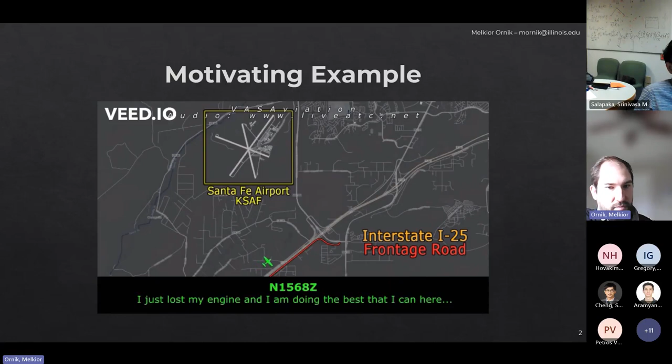6-8 Zulu, declare an emergency. Roger, you want to come in for runway 2-0? I don't know if we can get there - we just lost our engine power, something's happened. Roger, wind is 2-3-0 at 10, you're clear to land any runway at Santa Fe, altimeter 3020, can you give me some information? I'm 6 south, I've got a big vibration going on, my prop's going bad here and I don't know what's going on - I've been at 8,500, I don't think I can get to the runway. Make straight in for runway 2 if you can, but the wind will be a tailwind, 230 at 10, you can have any runway you want, clear to land. I don't know what's happened here, I have no oil pressure. Right on final for runway 2, you're 7 miles from the airport. I don't think I can get - I'm not gonna make it. Let's see, where's our best place to go? I'm gonna try to stay away from that ravine - freeway. I-25 is in your vicinity, and maybe the frontage road off of I-25. There's 3025 - I'm just not gonna make that, I'm not gonna make it. 6-8 Zulu, can you tell me what's going on now? Try to land on the freeway here if I can. My engine - I have lost the engine, and I'll do the best I can here, to try to land on the freeway or on the frontage road. I think I'll take the frontage road. That'll be a good idea if you can. The Santa Fe winds are 240 at niner.

Landed. I'm landed. I'm landed.

Okay, so I included these last few seconds just to make sure to tell you that everything is okay with the pilot. The pilot survived, but this is the story that I'm interested in exploring.

So what happened here is we had an airplane. It was a small private airplane, not the one pictured here, where something went wrong, and it's not entirely clear to the pilot at the beginning what is wrong, and then these errors or faults seem to be compounding. He says, 'Oh, I have a big vibration going on,' and 'Oh, I lost the engine power.'

So there's a lot of uncertainty here about what's going on, and what the pilot is ultimately seeking is what I would call maximal understanding in the face of this kind of minimal or limited knowledge that he has.

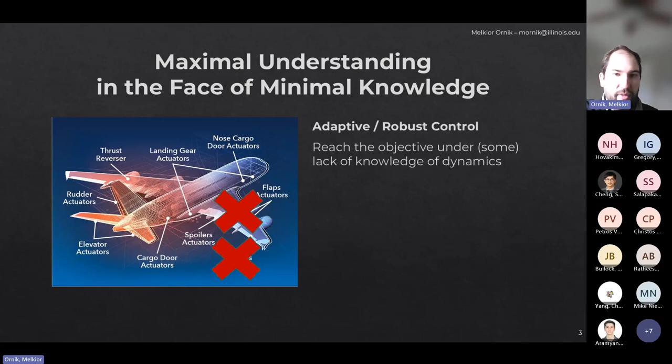The problem that we have here, and the problem that the pilot seems to have faced, or at least believed he faced, was that the objective might not be reachable. If there are no physical capabilities to land, if you simply can't make it, at that point there's kind of limits to what robust control or adaptive control or any other kind of control can do. If there is no control law that will take you to your destination, then you can't do anything.

And so in this case, the pilot did what the FAA regulations say he should do: he decided on an alternative target, an alternative destination. There were no runways around, so he decided on the freeway or the frontage road of the freeway. He says relatively early, 'Okay, let me take the interstate or the frontage road,' and then he figures out how to get there, and in this case he succeeds.

And so this is the story that I want to explore. This is a story in which control is a part of it, but part of it is deciding on where we can try going. In terms of the standard term people use, pilot in command, that implies the pilot has the final authority on everything happening in the airplane.

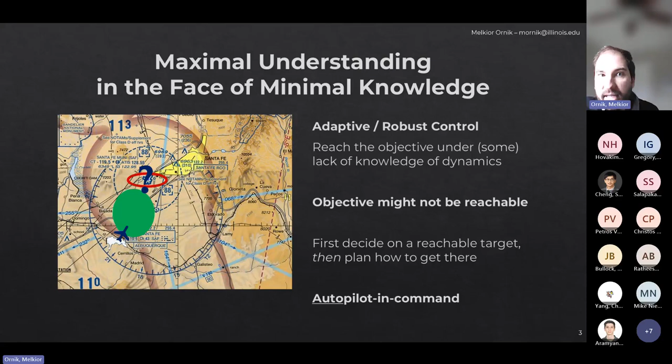I want to develop something that I would call autopilot in command. So a system that is not simply oriented towards trying to achieve the task as best as possible, but has some sort of higher level reasoning of what am I certified for, what can I believe to achieve, given that I don't know everything, given that the system changed now.

And so formally, what I'm interested in this talk, and what a lot of our activities related to the ULI have been, is trying to get some sort of conservative estimates of completable tasks given a change in system, whatever that change means.

Formally, it means this: I have some sort of partially known novel transition model that happens after an adverse event. I call it partially known because there is some knowledge that I have. I have the original nominal transition model that helps me in some way. I have some knowledge of the design of the aircraft that also helps me know something about how the aircraft is operating.

I have some knowledge of physical laws, so I do have some pretty heterogeneous partial knowledge. I also have a partially or imperfectly observed past trajectory or current trajectory of the system that should also give me information about what I'm capable of doing or not capable of doing.

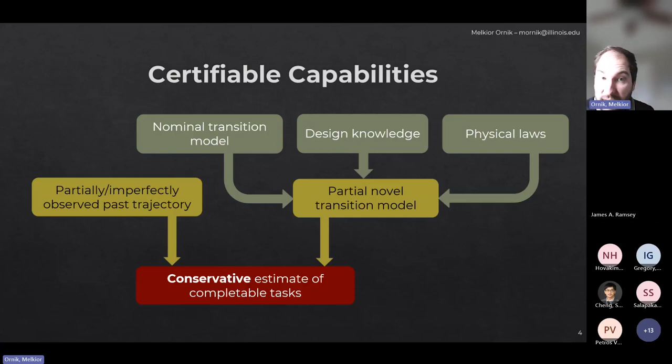And so I want to focus on, first of all, this phrase conservative estimate of completable tasks. I'm looking for something akin to formal validation, where I can say: regardless of what the ground truth is, for all possible ground truths consistent with the knowledge that I have, I can complete this task.

And this happens before figuring out how to complete the task. These are two different topics. How to complete the task comes second and certainly requires some online learning, some adaptation, some robustness. But I want to do this before learning how to complete the task.

And perhaps I want to even have a loop here where I figure out, okay, I'm definitely capable of doing this, and then I learn a little bit, and now I become less conservative, and I say, oh, I'm actually capable of doing this as well.

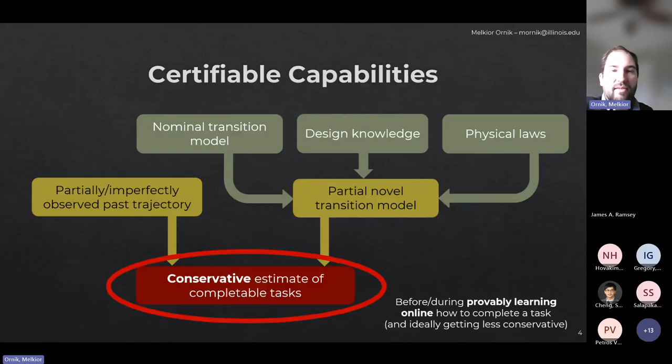And then I proceed and become less conservative. To give some mathematical meat to what we've been doing, I'm going to use a few slides that appeared when we all met at UIUC last semester. I want to model these disasters, these changes in the system, in three possible ways. I'm not necessarily claiming these are all the ways, but the combination of them is a fairly large class of possible things that can happen to the system.

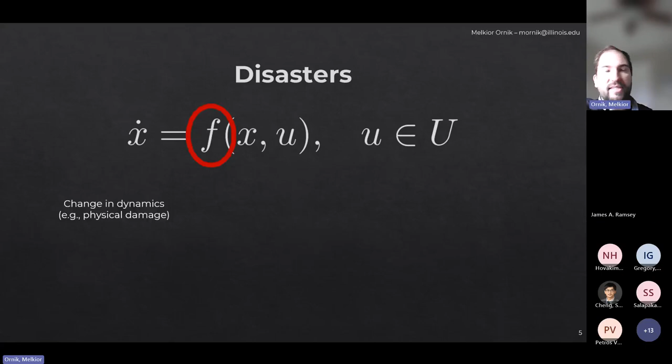The first one is a change in dynamics, so that the system, which used to be guided by x dot equals f of x, u, is now driven by some other f, possibly due to physical damage, for instance.

The second one is partial loss of control, whether it's actively lost through adversarial takeover, or simply that some of the controllers are now under environmental authority and can just put in random inputs. But basically, I don't have control anymore over the inputs.

And the third one is actuator degradation. So the system still has the same dynamics, I still have control of the actuators, it's just that the actuators lost their capabilities somewhat. They are now capable of doing less than they used to.

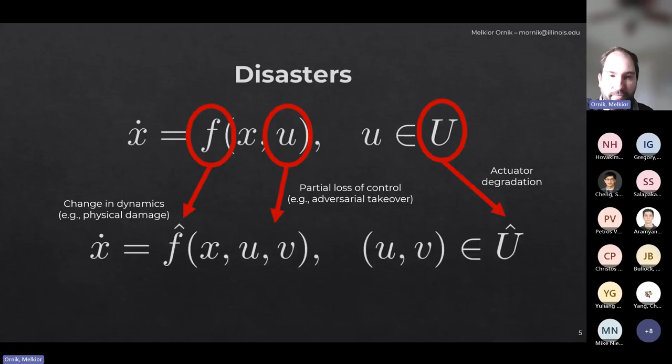Combining these three stories, we get a new kind of partially known transition model, x dot equals f hat of x, u, v, where f hat are these new, perhaps unknown or partially known system dynamics. U is decomposed into new u and v, where u is still under my authority and v is inputs not under the controller's authority anymore. This u, v now lives in some u hat, and u hat is the degraded set of possible control inputs, so u hat is smaller than u in some sense.

I want to go through these maybe from right to left, giving a few slides on each, saying what we're thinking and what I think the crucial mathematical ideas are. For today, I'm going to be talking about nonlinear, continuous time, sort of deterministic systems. That doesn't mean these ideas don't apply to other frameworks, it's just what we started with, and it seems mathematically very elegant. Yet the same high level ideas can apply in other frameworks as well.

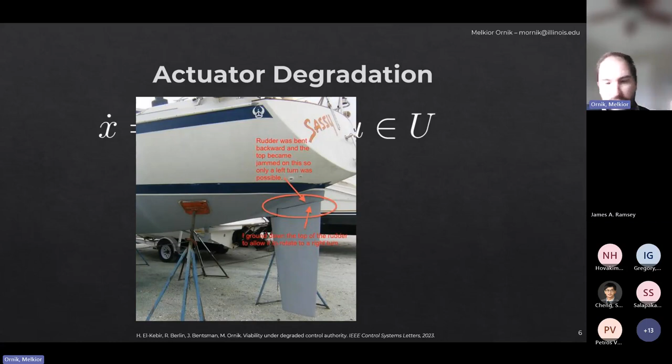An example of that is this, I found this on a sailing forum because it's a very nice picture. One of the sailboat owners said there's some damage to the back of the sailboat, so the rudder was bent backwards, and so I can't move to the right anymore, or almost at all to the right. I can still make a left turn, so he can still control the sailboat, he just has less of an interval, or less of a set that he can put in.

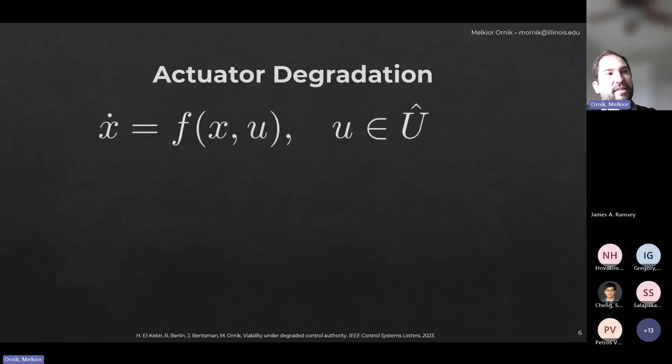Now this is, of course, equivalent—or not actually equivalent, it is less general, perhaps—to a different framework which we established and played with in a paper this year or last year, which is x dot equals f of x, p of u, where u lies in the original u. P is some sort of possibly saturation, which will reduce this set of control inputs. But it doesn't have to be saturation, it could be something that attenuates the gain or size of the control input, or some nonlinear function that changes the control input.

What we're interested in here is: okay, I have this new system, how do I figure out what is possible about that system? What tasks can we complete? Within the context of this talk, although we are definitely interested in more complex objectives, I'm primarily going to focus on reachability analysis.

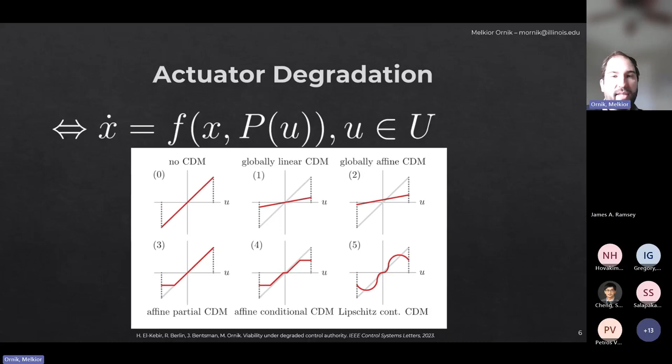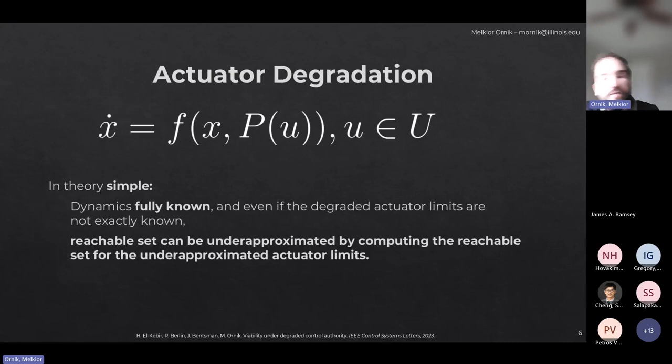So the question here is: I have this system that's fully known, and maybe I don't know something about P, but I might have some bounds on P, some under approximation of the capabilities. Figure out what's reachable by this system. In theory this is not a new or even interesting problem, because I have fully known dynamics, so all I'm asking is compute the reachable set of this system. Well, the system is kind of ugly, but still I know the dynamics. What can I do here?

Well, the problem is that I want to do this from my perspective of motivation, in real time or near real time. In practice, reachable sets of nonlinear systems are not computable in real time. Certainly even meaningful under approximations of those systems, and I'm interested in under approximations because I want to be conservative, are difficult.

So what is often done in practice is computing something called the operational envelope, which is a kind of proxy for a reachable set, where we say if the system is within this set, then it can do something. So it's somehow related to this reachable set. But the point is, this computation, this description of the operational envelope takes months to develop, whether through simulations, mathematical analysis, extensive testing, whatever it is. So this is not something done in real time.

Yet I need to adapt, or react to an adverse event in real time. And it's impossible for me to simulate all possible adverse events and have a giant database of all possible reachable sets. So what can I do?

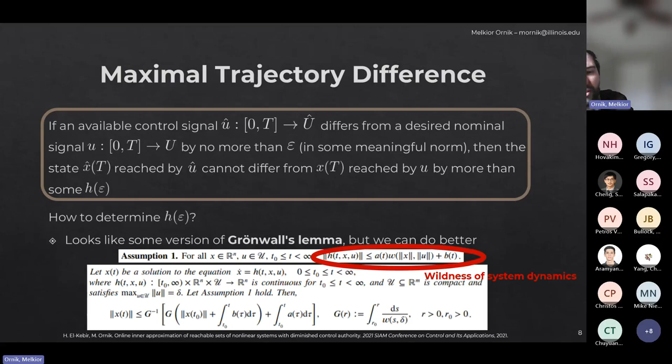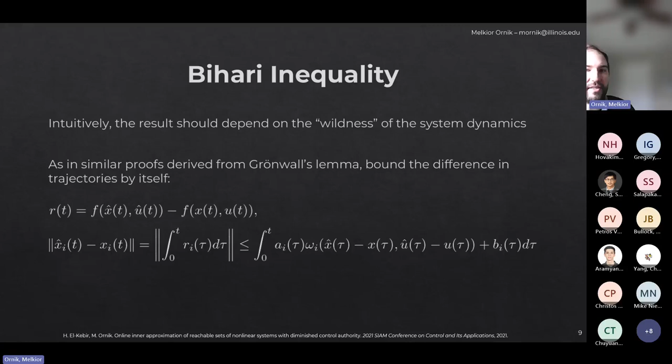This is true, there is a continuity argument. It looks like some version of Gronwall's lemma for folks who do nonlinear and linear dynamics, but we can actually do better. This is something a student of mine proved: given how far the available and degraded control signals are, he can give you a bound on how different the states reached by these two control signals are. This bound certainly depends on what I call the wildness of the system dynamics. So if the dynamics are very wild, then even a small change in the control signal can lead to a large change in the reached state. This is a generalization of something called the Bihari inequality, and the proof is similar to Gronwall's lemma. Again, the important part is that the result depends on this wildness of the system dynamics.

So the idea is this: if my old reachable set is gray, then the theory we developed says that within a ball from each gray point—and in this case my balls are rectangles, since it's perhaps better in some cases to do things for every coordinate separately instead of all together—there exists a state reachable by the degraded system, which I denoted in red. So around each ball around a gray state, there exists a red state. So to each gray state, I can assign a nearby red state. Now this still doesn't exactly tell me what the reachable set is, because I can assign the same red state to possibly a bunch of gray states.

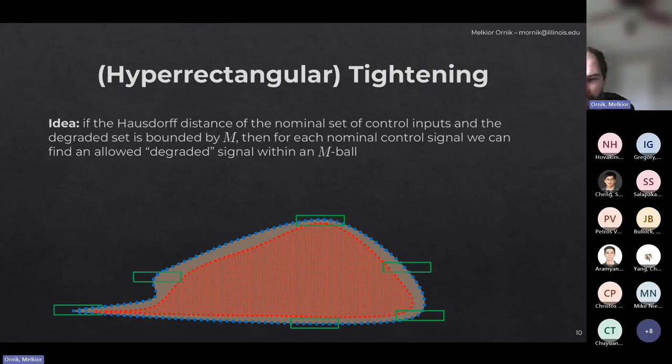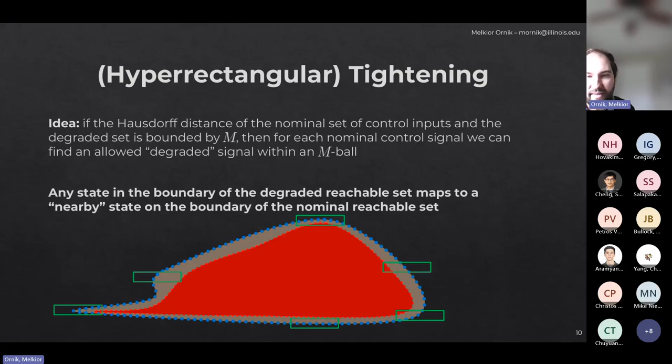So how do I know that this red set, the degraded reachable set, doesn't have a lot of holes in it in some sense? It turns out it doesn't. That's the second result: any state on the boundary of the red set also maps to a nearby state on the boundary of the gray set. So not only is red a subset of gray, but their boundaries are not too far from each other.

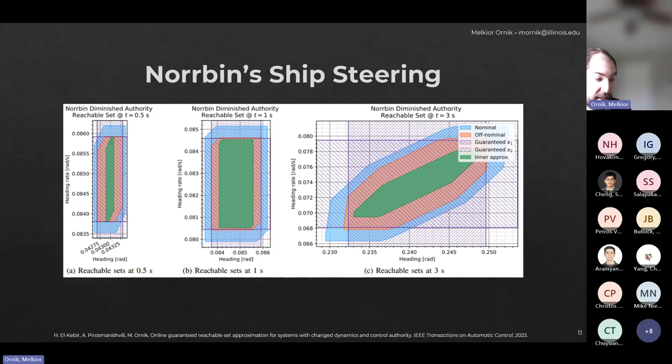What we're interested in now is two directions. One is how do I make sure the quality of this approximation doesn't diminish over time, which it currently does because of these differences in the wildness of system dynamics that compound. The other question is how do I do this for more complicated systems? So right now we're interested in approximating dynamical systems with polynomial approximations.

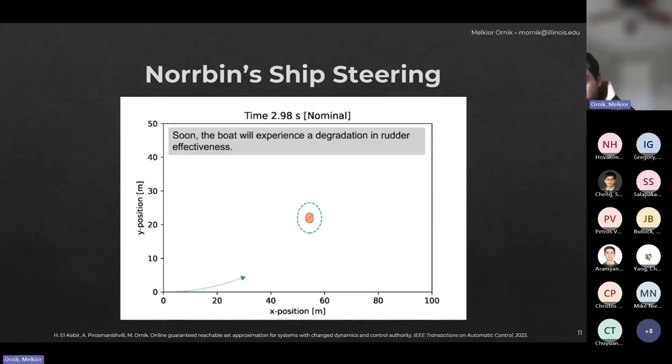But as an initial proof of concept, we have a picture of a boat going from the left to the top right corner, and it originally has a control law that avoids this unsafe blue region. At some point, the boat suffers degradation of the control inputs. We compute an under-approximation of the degraded reachable set, and we see that this under-approximation still has an element to the right that doesn't intersect the unsafe set.

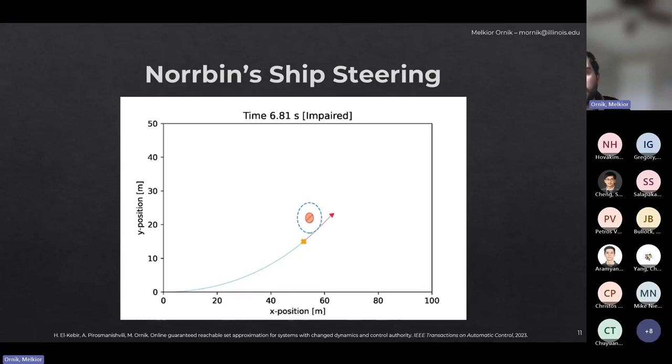So we know there exists a control law, although we still don't know what that law is, and I'll get back to that. But we know there exists a control law that allows us to escape from this unsafe set, or avoid reaching it. Okay, so this was the first and supposedly easiest part, the actuator degradation, which turns out to not be easy at all.

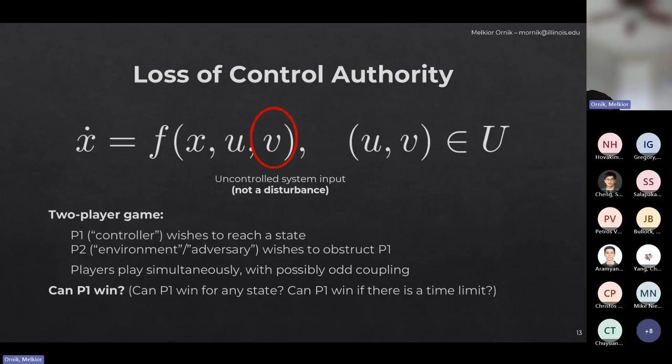Can player one win for any starting state, for any reaching state? Can player one win if there's a time limit in which to reach that state? And there are perhaps two key features of math that I want to introduce here. One is just from intuition.

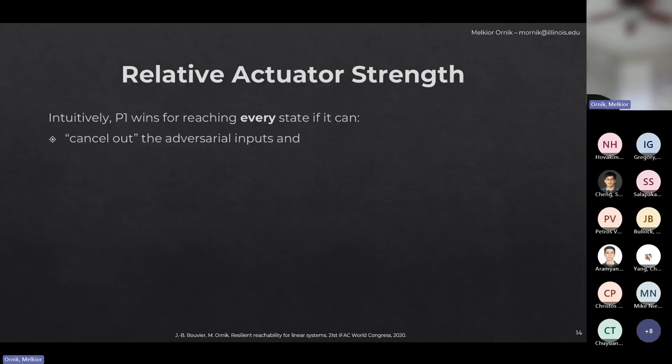I kind of said the pilot seems to be unable to counteract the bad inputs, the adversarial inputs. And so intuitively, player one wins if it can cancel out this adversarial input and still have a little bit of useful control. So still successfully fight what I call the drift, or exploit the drift at the same time.

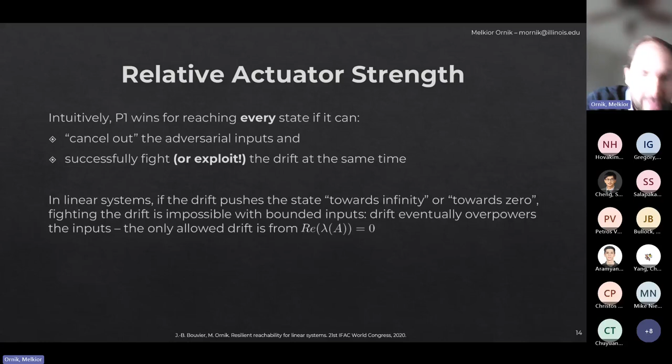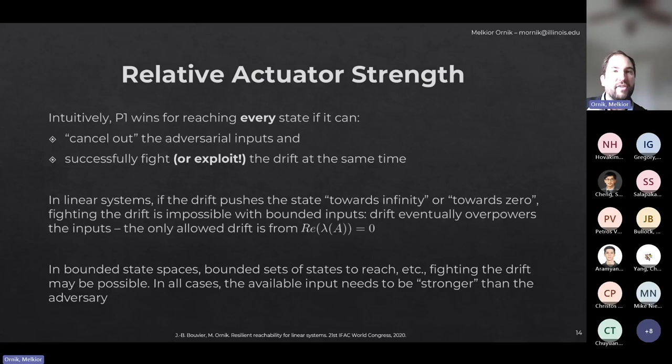And so it turns out that in linear systems, or in linear unbounded systems, that's very difficult to do. But in bounded state spaces, bounded sets of states to reach and so on, fighting the drift might be possible. And in all cases, this intuition of the available input needing to be stronger in some sense than the adversary is important. So let me try to formalize that just for basic linear systems.

So if the original system dynamics are x dot equals Ax plus b-bar u-bar, after a loss of authority over some actuators, I have x dot equals Ax plus Bu plus Cv, where this original set of inputs, or their effects, b-bar, is now separated into B and C. C is no longer under my control.

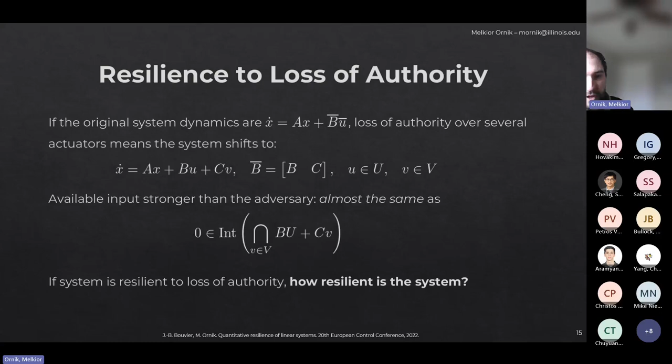Then the next question I want to ask is how resilient the system is. And I'll just go through that very quickly because I think it's the definition that's kind of interesting. So if the target state is in the guaranteed reachable set, or it's in the reachable set of the initial state, then by my current definition, the system is resilient.

However, let's say it originally took me 5 minutes to reach a particular state, and now it takes me 4 hours. Okay, fine, it's still resilient. It's definitely not very resilient. I might get into all kinds of trouble, fuel, whatever it is.

And so what I'm interested in is quantifying how much performance I lose by losing an actuator, or by losing control over an actuator. And so the idea here is to compare the quotient of the nominal time-optimal reach time and the worst-case time-optimal reach time with the adversarial input.

So the bottom here is this worst case, and of course you could argue that I could have had inf-sup or max-min-max, whatever it is. The way that we phrased it is basically the adversary chooses an input such that whatever the controller chooses, even if the controller fully knows the adversary's input, reach time will be as large as possible.

And what's cool here is that this RQ, this resilience quotient, is a number between 0 and 1. 0 means that there's no resilience. It means that if I lose control over an actuator, I'm not able to reach my state anymore. It being 1 means I have perfect resilience. I didn't really lose out on any performance by losing a particular actuator.

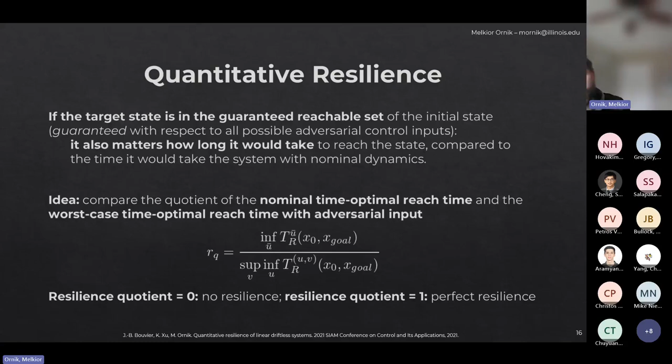This is a fraction of it. At the top we have an optimal control problem. At the bottom we have an optimal control problem that's nested into an optimization problem. And then I still might want to optimize over all possible reach states or initial states, whatever it is. So these are 3 or 4 partially nested optimal control problems. This is hard to solve.

It turns out it is possible for simple systems, for kind of driftless systems, integrators. Optimal control there turns out to be optimization. Optimal control inputs can be geometrically determined. There's this notion of direction in which the adversary is the strongest, and it's possible to determine the least resilient goal state.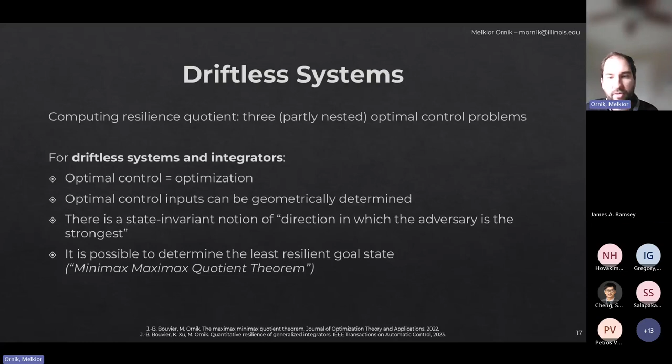This is something that a student of mine who recently graduated called the minimax maximax quotient theorem. This already is not easy. He published a paper in the Journal of Optimization Theory that's 15 pages or so, and it's basically just the one proof of this theorem. And this is just for driftless systems. I'm not even talking about fully nonlinear systems, I'm talking about these toy examples.

So the question we can ask is, okay, how do I go from this into the real world? How do I start talking about real linear systems, even nonlinear systems? It turns out that even for general linear systems, this is not possible to analytically determine. We just know that it's bang-bang from the Pontryagin minimum principle.

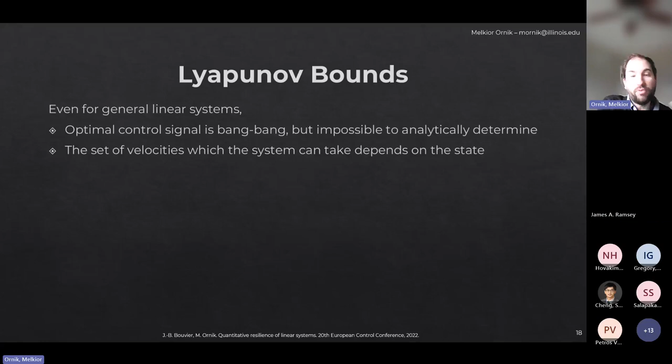So what we do here is try to bound this resilience quotient. We look at the lower bound of the nominal optimal reach time through a bound on the flow of a Lyapunov function. We look at an upper bound of the nominal optimal reach time, lower bound of the worst case optimal reach time, upper bound of the worst case optimal reach time. So this gives us some sort of bounds on this resilience quotient.

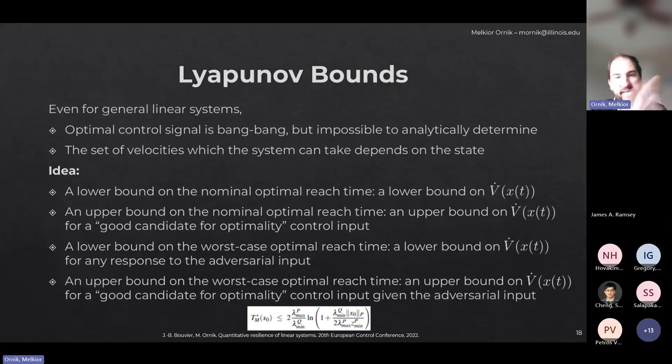So if I know that the resilience quotient is at least 0.5, that says, okay, at most, if you play perfectly, you will lose half, or it will take you double the time to complete your mission. But this is still for linear systems, and already here we kind of start to feel our theory slipping.

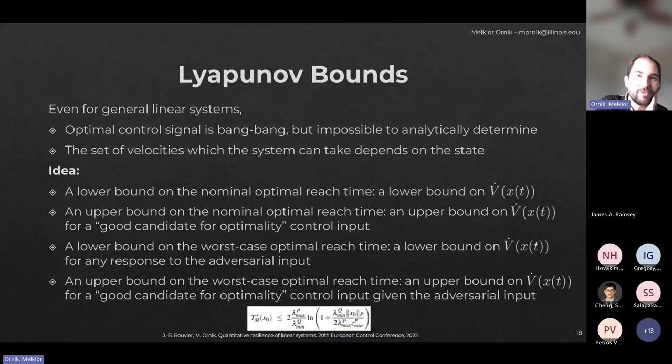So what do we do for nonlinear systems? We started playing with that now, especially within the context of this ULI project. The current feeling is that time resilience is hard, because even simple looking optimal control problems in terms of minimal time are actually not simple. Determining the minimal time to reach a target just for nominal dynamics with input constraints is not a simple problem. Yet determining minimal energy to reach a target for nominal dynamics is a simple problem. It has something to do with the controllability Gramian, at least for linear systems.

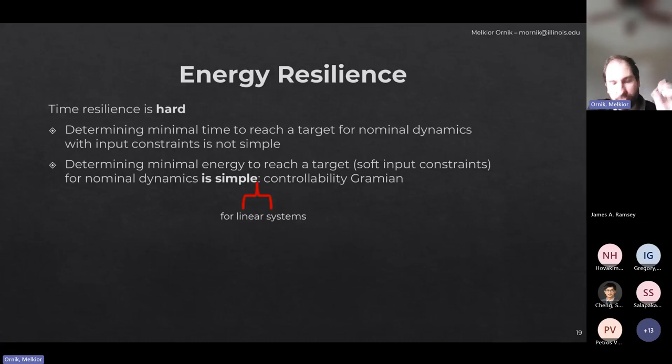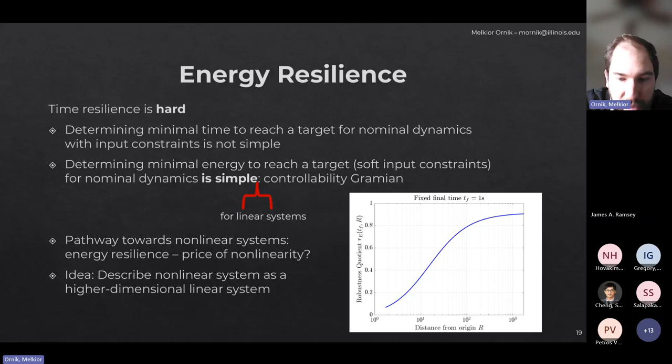So what we're currently hoping, and getting some initial results on, is that perhaps by moving from quantifying time resilience to quantifying energy resilience, that will get us one step further towards nonlinear systems—saying something like, if the system is nonlinear, how much more energy do I lose compared to a linear system that's close to that? One possible idea is to describe the nonlinear system using Koopman methods as a higher dimensional linear system, and perform these energy resilience calculations on that. We've gotten some initial results, and a student of mine is hoping to submit a few papers on this topic within a few months.

Going back to the work we've completed, we have some results. The first thing we played with was, since I had that video of the F-117, we took a model of a fighter jet—not the F-117, but an academic fighter jet called the Admire model. We said, okay, if you lose the right elevon, are you resilient? In other words, could the pilot have done something better than what happened to that airplane if the environment was as mean as possible, playing exactly the worst things for the pilot?

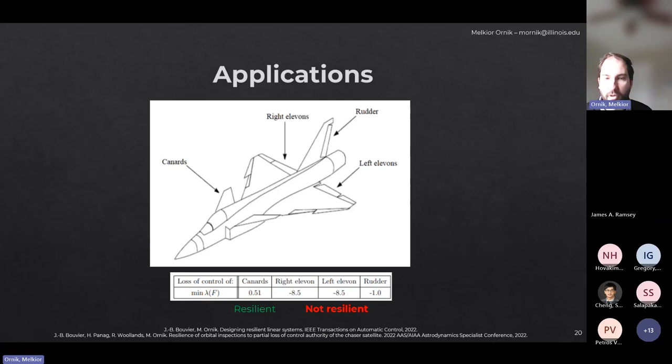And it turns out that this is a question ultimately of finding some eigenvalue, or minimal eigenvalue, of some matrix. And it turns out that the system is indeed not resilient. So if the environment played exactly the worst, there is nothing the pilot could do to keep the system stable or to reach this kind of stability state.

We've started playing with this in some other applications. So we have this notion of time delays that I'll still spend a minute on with satellite inspection, and so we're kind of pushing that forward. Let me not go into that further.

Let me go into the third possible kind of class of disasters that I promised I would be talking about, which is mostly the hardest because it kind of subsumes the previous two classes, and that's change in dynamics. So in this case, instead of x dot equals f of x, u, I now have x dot equals f question mark of x, u. And this question mark is an unknown function. This is not a disturbance, and this is not finitely many unknown parameters.

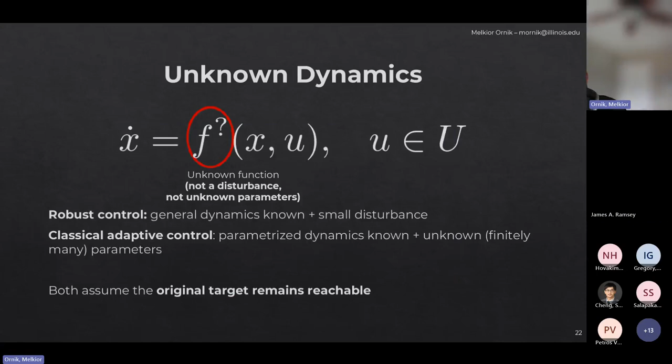Importantly, because of this, all the great methods that we have of robust control or classical adaptive control kind of focus on the original target remaining reachable, but the original target might not remain reachable. To show that, I have kind of a video. So these were RC airplanes, but certainly the airplane that's currently in pretty much free fall, there's no god of robust control that's going to make you proceed with your task, right?

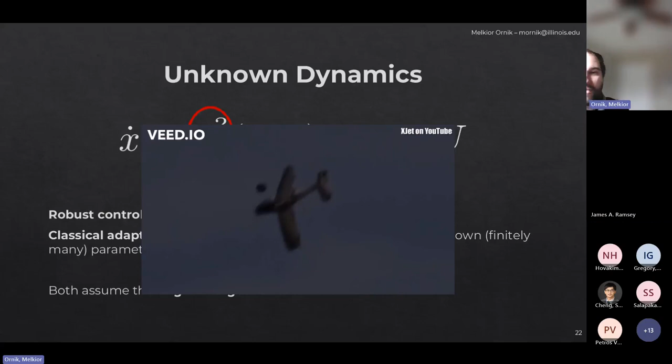And so the question here is, okay, what can we do? Is there a reasonable destination? Is there a reasonable outcome that allows me to salvage whatever I can from this mission? And so the question that I'm interested in is, what is the system certifiably capable of doing, even if I don't yet know how to do it? And the answer is, well, it depends on what you know about the system.

If you don't know literally anything, if the dynamics can just change randomly at any given time, and there's no rule to this, it can kind of jump around entirely, and you have no knowledge of it, then yeah, you can't prove anything. Nothing is certain, right? However, if you do have some class of possible ground truths, and I'm being very broad here, this doesn't need to be a small class, it can be an infinite class, it can be unbounded, whatever it is, I can define this notion of a guaranteed reachable set.

And a guaranteed reachable set is just an intersection of all the possible reachable sets. So the intersection of all the reachable sets for all the dynamics that are consistent with the current knowledge. And so I know that if I'm in this guaranteed reachable set, it means I'm reachable by all the possible ground truths that I haven't disproved yet.

Okay, so I defined this guaranteed reachable set. What do I do with it, right? How do I compute it? If you look at it, I'm asking you to compute an infinite intersection of reachable sets, so infinite and weirdly parameterized, or not parameterized, intersection of reachable sets of nonlinear systems. How do I do this? How do I do this in anything close to real time?

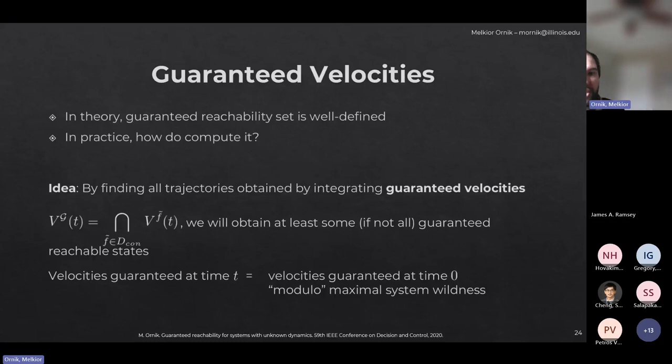Okay, so to do that, we need these two pieces: what are the velocities guaranteed at time 0, and what is the maximal system wildness? So the first one can be computed ideally in an arbitrarily short time, although that kind of depends on your system response and the resolution by which you can change your controls. But basically, by this notion of myopic control, you can compute the set of initially available velocities. You can get a bound on the change in the set of available velocities from known system parameters, possible Lipschitz bounds from physical laws and/or design knowledge.

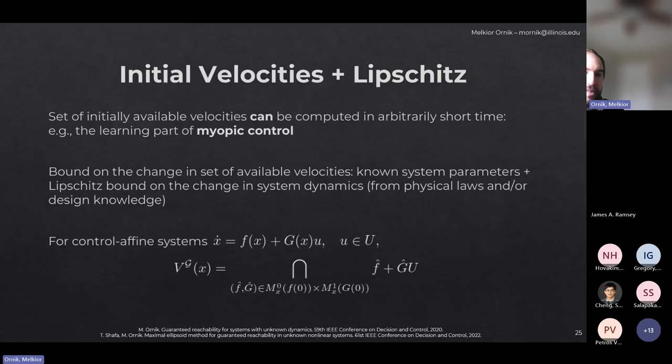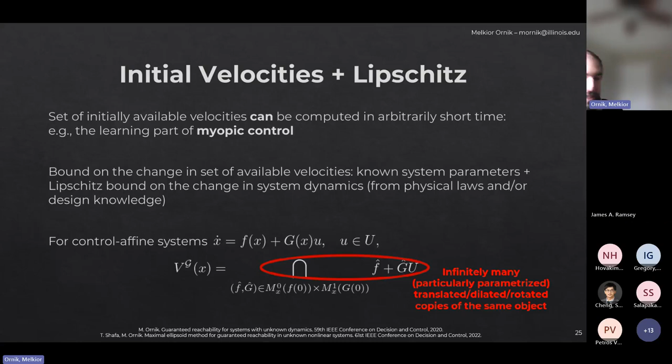So it turns out that we can compute these guaranteed velocities, still not easily. These are again infinite intersections of now perhaps geometrically more simple objects, at least than the reachable sets. How do we under-approximate those? Well, an initial idea is, fit some sort of a simple geometric object within this weird intersection.

And so our initial idea was fit a maximal ball, but then there's better ideas. Fit a polytope, fit an ellipsoid, fit whatever it is that you can then perform, that you can then kind of try to find reachable sets of an ordinary differential equation or inclusion that's kind of generated by these sets.

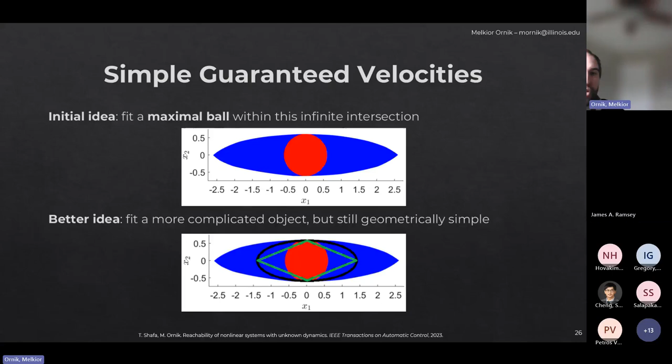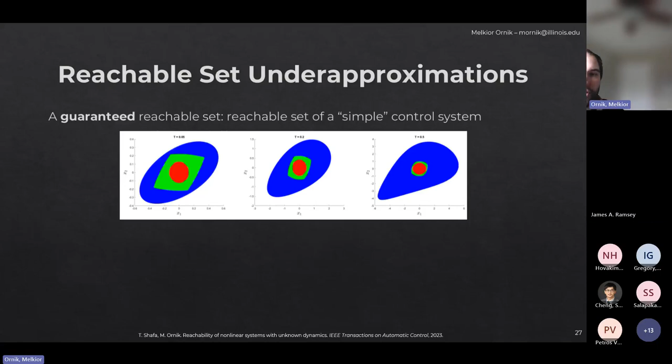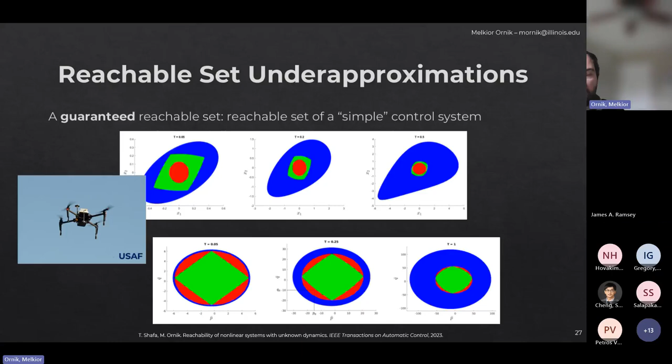So we've done this. We computed some guaranteed reachable sets. Turns out that computing a guaranteed reachable set using our method is computing a reachable set of what I call a quote unquote simple control system. We've done this again. An issue is, first of all, we've done this for simple systems, and the quality of these guarantees falls over time. So we can provide meaningful guarantees only for short times.

And importantly, what I said I would get back to, I didn't really speak anything about control yet, right? I just said, okay, I will have some ideas of establishing what the system is capable of doing. Yet I don't know yet how to do it.

And so what we ultimately want to do, and I mean what we, if I can even speak for the entire project, the idea of the project is we want to have this kind of end-to-end planning, learning, and control. So we want to figure out what tasks can be provably completed. I call that task assignment.

We then need to know what we need to figure out in order to be able to complete it. So we need to have some sort of learning or real-time learning, whether we want to call it learning or adaptation or figuring out how to be robust, but we need to have some sort of real-time estimation. And so our method of doing that for now is this persistent excitation, but it's not necessarily the only method.

And then we need to perform, in as much as possible, assured control. So once we figured out the task that is to be completed, we want to complete this task.

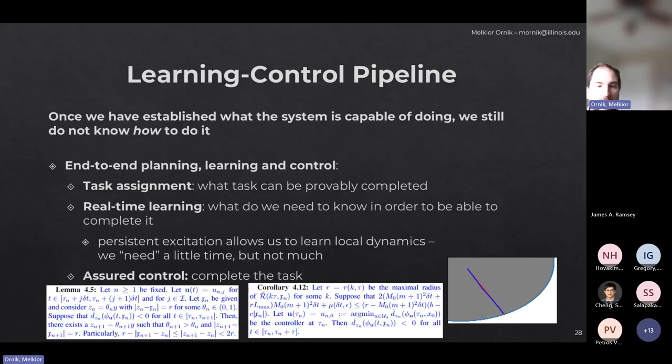And so we've started playing with the learning part of it. We've started playing with assured control for simple tasks. Hey, just follow a straight trajectory. Just reach a particular state that you're guaranteed to be able to reach. We can do better, and I'm saying in particular in terms of the ULI project, combining our work with the work of others, we can get further than these simple examples.

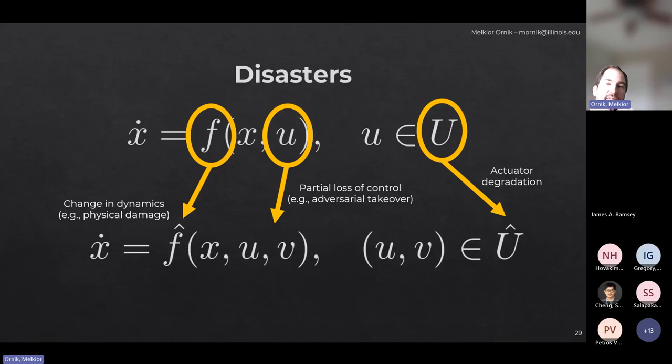Okay, so now I've hopefully kind of convinced you of mathematical interest and that we have a clue at how to attack all three of these problems. And so what I want to spend maybe the last 5 minutes on is saying, okay, what's next? What do we still need to do? The way I see it, we have two major challenges.

The first one is complexity. I don't necessarily just mean computational complexity. I mean, what are the systems for which we can estimate these capabilities? What are the capabilities that we can estimate? So right now I'm just talking about reachable sets. Can I talk about some more interesting, some more complicated control specifications?

And then the second one is what I call validation. And I don't necessarily just mean formal validation, although that's certainly a part of it, but in reality, what can we do on board during or immediately after a disaster, after an adverse event? And so just some thoughts on our efforts to proceed in both of these lines of interest.

Complexity is kind of, I feel, a lower hanging fruit in the sense that at least we know what we don't know. So a lot remains to be done. We have a lot of technical assumptions: linear systems, loss of control authority for now, kind of full actuation for unknown dynamics. These kind of annoying yet important technical assumptions. We also want to combine these scenarios that I was talking about, and we started doing that. Importantly, we can start being smarter.

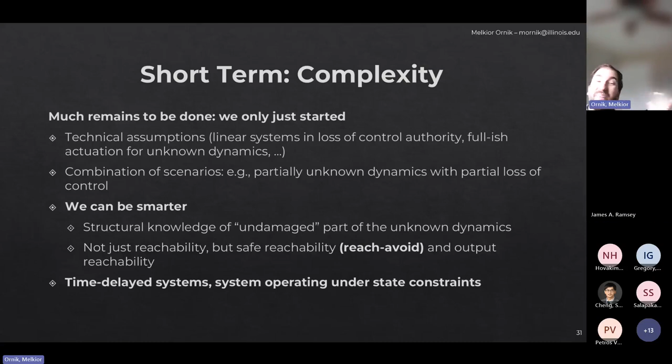We can talk about structural knowledge of the undamaged part of the unknown dynamics. We can start talking not just about reachability, but about safe reachability. And then we need to start building a richer mathematical theory here. We need to start talking about time-delayed systems, and about systems operating under state constraints. And so we started doing that.

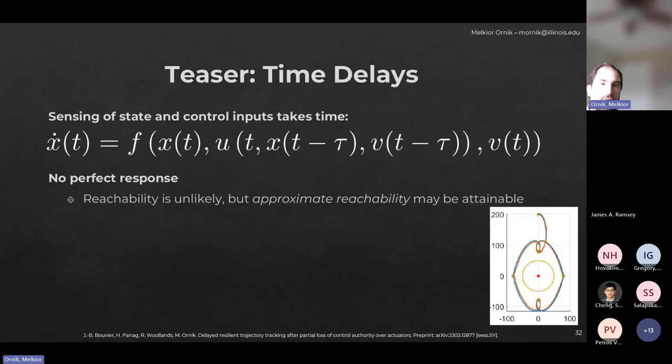We've done some initial work on time-delayed systems, in which case, if there's an adversary playing against you and you are delayed by time, you don't have a perfect response to the adversary. So reachability is unlikely, yet approximate reachability might be attainable. We can ask, how much damage can the adversary do by exploiting delay? How imperfect can I be if there's a delay? Intuitively, that depends on how large the delay is and how wild the system dynamics are.

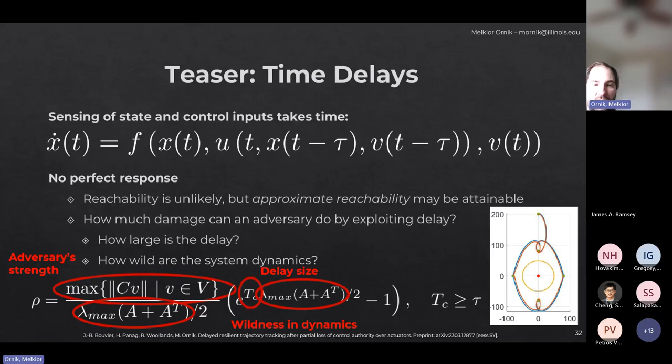The results we have on this amount of imperfection, or loss of performance, caused by the delay, turn out to depend exactly on how strong the adversary is, how wild the dynamics are, and how large the delay is. A second teaser: we're just about to submit a paper on this, and this is really exciting, I think, from a mathematical point of view.

We're interested in these state constraints, so we're developing a guaranteed reachability theory on subsets of Rn, or on manifolds to be specific. Now, if I'm operating on a manifold, already the notion of an ODE is kind of difficult, right? Because my X is on a manifold, my X dot is then on the tangent space of a manifold. Finding the reachable set of a known system on a manifold - a manifold, as one of my earlier circles showed, is a kind of side information. I know that the system is operating on this subset.

Finding the reachable set of a known system on a manifold, or on a subset of Rn, is already a challenge. Analytical methods are hard enough on Euclidean spaces. We don't necessarily even know how to approximate solving ODEs on a manifold, so there are just no good tools to do that. The ideas for guaranteed reachability, at a high level, kind of remain the same.

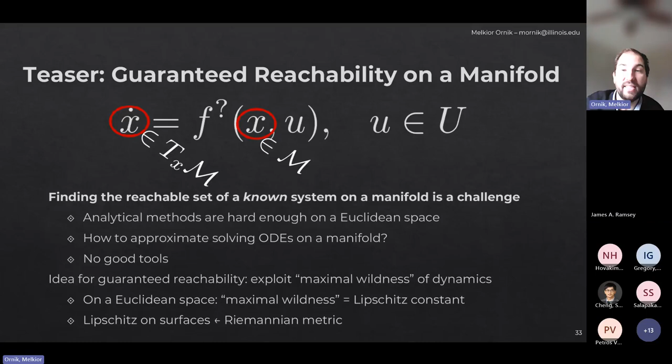We exploit maximal wildness of the dynamics. But maximal wildness now becomes more difficult because it's no longer just Lipschitz constants - it's Lipschitz constants on surfaces or on manifolds, which has to do with manifold curvature, which has to do with the Riemannian metric. This is something really exciting that I think merges mathematical richness with what we really need in order to simulate or work on real systems with state constraints.

Now I want to talk about this high-level story, the long-term story of validation. How do I actually go from little toy examples to real systems? Real systems have sensors, real systems have perception that helps us recognize fault type and gather information - whether that's a good thing or not, because sensors and perception are imperfect, and our models currently just say, oh yeah, you can see the system state immediately. It is reality, so we need to use those.

We need to develop methods of fault detection, sensor fusion, and state estimation simply in order to get the state to perform these guaranteed reachability computations. This is part of our ongoing joint work with the rest of the TC3 team, with Ali and Yanis.

Importantly, we want to perform complex missions in high fidelity simulation. We want to have concurrent sensing and actuation faults. We want to have hostile action - and by hostile, I mean also environmental action - plus this kind of regular noise that aircraft are used to. In order to do that, we want to make use of high fidelity simulation tools, for instance Guam.

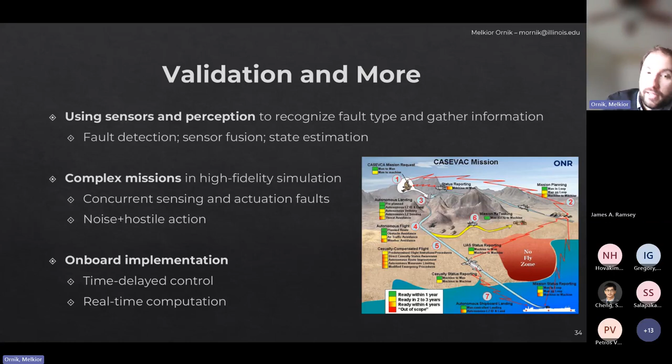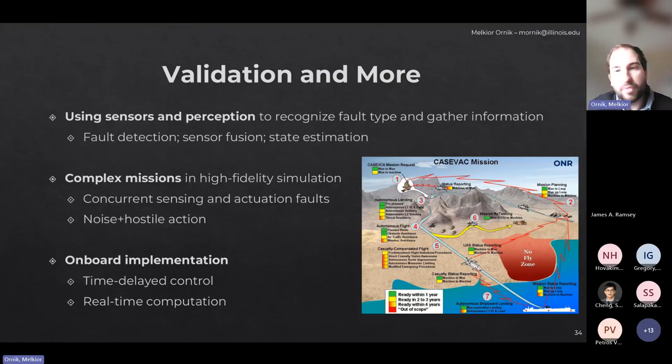In the very long term, we want to start thinking about actual onboard implementation, where my computational constraints and time constraints are much more critical. So we want to start getting real results on what I can do with time-delayed controls, and how complex my computations are, whether I can perform them in real time. Right now, a lot of what we do is better than naive ways, and we can do them perhaps on a personal computer, but can we do them in real time with the actual hardware that would be onboard?

And so I want to stop here. I want to acknowledge the extensive support that we have from NASA, including the current ULI, but also some other projects, the support from the Department of Defense and the Discovery Partners Institute.

I also want to point out that I'm only able to speak here because I'm a mouthpiece for so many great researchers that work with me. Hamza Al-Kabir and an undergrad previous, Anipir Osmanishvili, who did the work on actuator degradation in collaboration with Joe Bensman and with folks from JPL. Jean-Baptiste Bouvier, Kathleen Shu, and Ram Padmanabhan, who are doing work on partial loss of control in collaboration with folks from PNNL and some of our other faculty members at UIUC, and Taha Shafa and Yiming Meng, who are doing work on unknown dynamics. I'm, of course, happy to take questions, happy to chat, whether online or offline. Thank you.

Okay, Irene, go ahead. So Melkior, thank you.

I have a question. So especially for the part of the work that deals with just the degradation and control authority, right? Have you considered taking your framework and seeing how it would collapse into things that we already sort of know about that type of problem? So adaptive control is very good at dealing with degradation and authority of control authority, right? And there's other things that allow you to basically see what happens when you have degraded authority in terms of what can you do, as something as simple as can you continue following the current trajectory to reach your destination, or maybe just a simple replan will allow you to do that, right? Have you considered looking at collapsing it to see how they compare, because it may give you a sense of, I think that's conservatism.